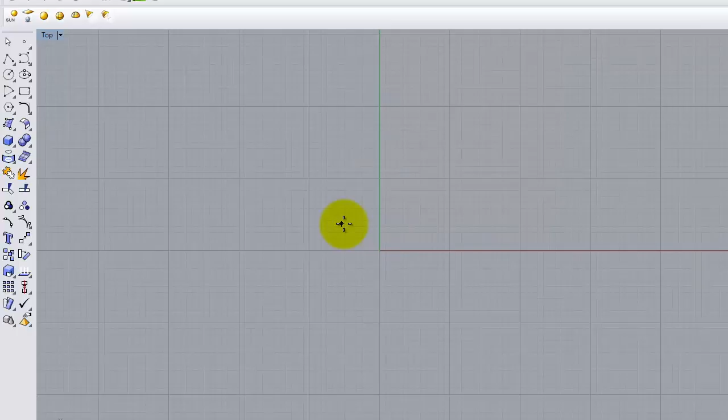We're going to start working through this coordinate system, beginning our drawing at point 0,0. I'll come to the tools and pick the Polyline tool, directly below the arrow, or type the key command Pline. The difference between a polyline and a regular line is a polyline is continuous through a set of points, so I can continue drawing.

Yeah? Your tools are missing, the left side is missing? How nice, right? You can go to Tools, Toolbar Layout, and at the bottom there's a Restore Defaults option - click on that and say OK. It'll warn you that you have to restart Rhino. When you restart, it'll fix the tools. It probably means your V-Ray toolbars will go away, but that doesn't matter for today. Restore defaults - under Tools, Toolbar Layout, at the bottom there is Restore Defaults.

So I'm going to continue on - you guys try to do that and let me know. I'm going to go ahead and start with the Polyline tool.

With Rhino, I can specify a coordinate by typing the coordinate value, just like in the world of math. So I'm going to start at 0,0 - 0 in the x, 0 in the y. When I hit enter, it'll start my line right at the intersection of the red and green axes, the x and y axes. It shouldn't be a problem.

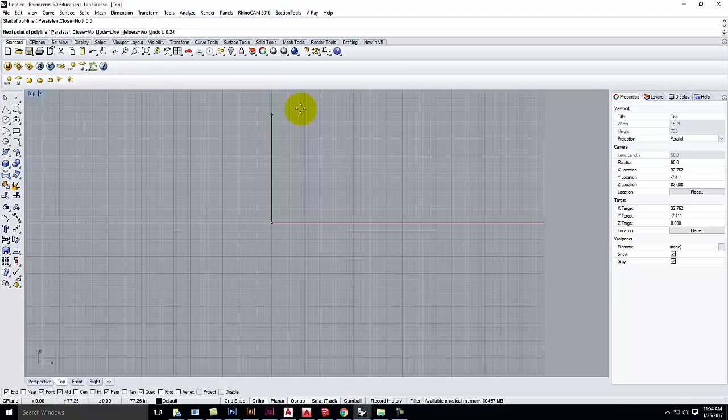At this point, I want to continue drawing using coordinates. Let's say I wanted a line to be 24 feet long, going up the y direction. I could type my next value, 0, 24, then an apostrophe for feet - just like before with 0,2, I can do 0, 24 feet. When I hit enter, I'll have a line that's 24 feet long. It makes no difference that my line went off the grid.

The grid is completely arbitrary - I can make it bigger or smaller. It just gives us a reference point. So I've gone 0,0, and the next point was 0, 24 feet.

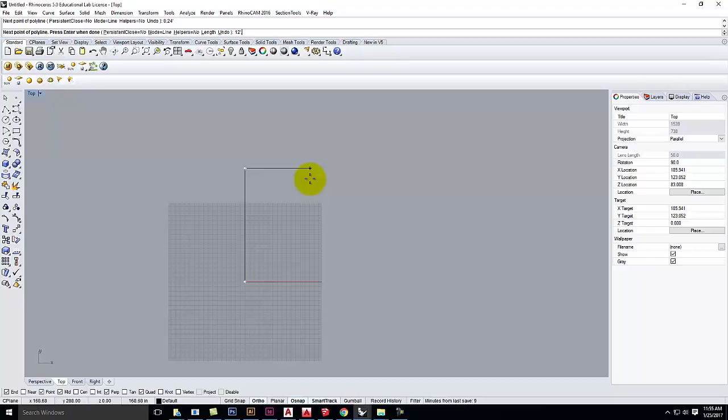Now I want to go 12 feet over, so I'll type 12 feet, 24 feet - oops, not 214, 24 feet - and hit enter on the keyboard. That puts this point out at 12 feet over and 24 feet up. Don't worry, I'm going to do this multiple times too.

So those are, as I said before, absolute coordinates - always relative to point 0,0, no matter where you are in space. The problem comes when you get to a point where you don't really know where your point is away from 0,0.

So the next point, I want to go 6 feet down from this point, right there. If I were typing it in, I'd have to say, okay, what's 24 minus 6? That would be 18, and I want to go over 12, so it would be 12 comma 18. But that's math, and we don't want to do math.

So we can use something called a relative coordinate instead of an absolute coordinate. We actually used this last class a little bit. A relative coordinate says, okay, pretend for a moment that the last point I clicked is 0, 0. So all I have to do is know where that point is and where I want to go from there. In this case, I want to go down 6 feet from my last click, so it would be 0 comma negative 6. But I need some way of telling Rhino I want relative to the last point.

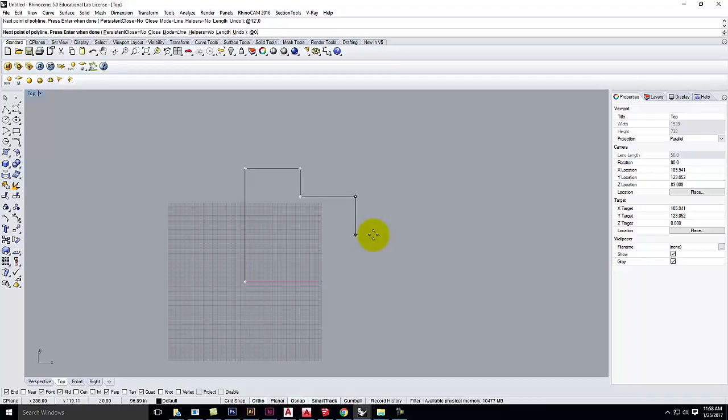I can continue in this same vein, and I could say at, relative to the last point, now I want to go 0 comma negative 12 feet, and then enter. Of course, I've done this a lot longer than you guys have, so translating these in my head backwards and forwards from relative to absolute is fairly easy because I have more practice. For you guys it takes a bit more thinking through, and that's why I have the little cheat sheet for you to follow along as I do this.

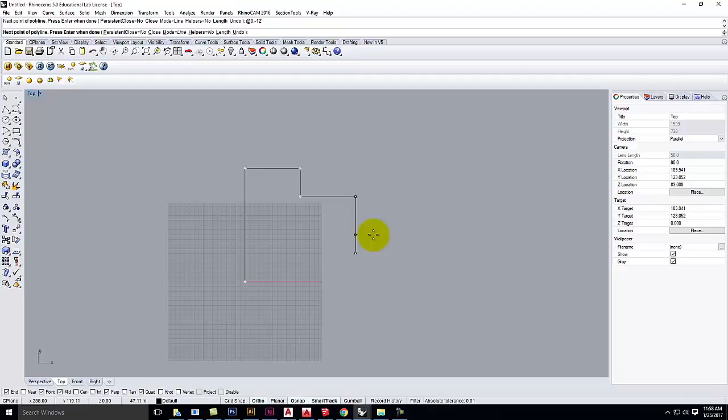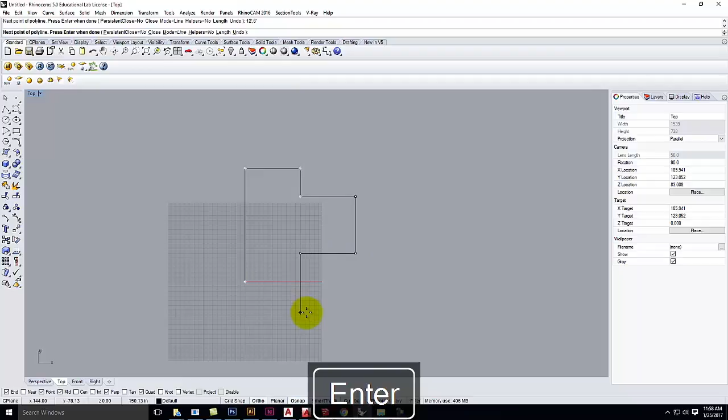So now let's switch back to having absolute coordinates. It would be 12 comma 6. So I could just type in 12 feet comma 6 feet and hit enter. That would be that point. Or I could say at negative 12 comma 0. Interchangeable.

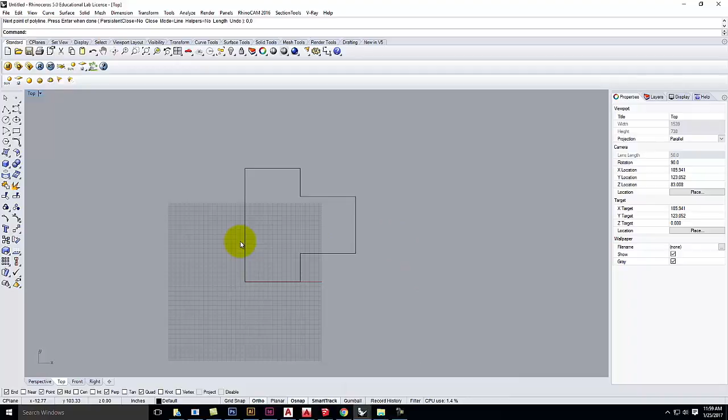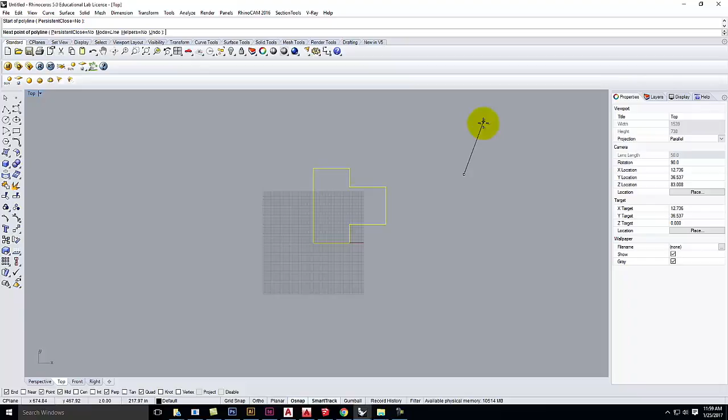So the last point, if I was doing absolute, would be 12 feet comma 0. Then I can come back and either snap, or specify 0 comma 0 as my starting point. So I drew this line all the way around. The absolute coordinates, relative to the origin of 0,0, work nicely when you're drawing right on 0,0. If, however, I started over here on a point I don't really know where it is, it would be very difficult to come up with the mathematical starting points for these. So in this instance, it would be far better to use the relative coordinates of at 0 comma 24 feet, and then continue. This would be at 12 feet comma 0, and I could work my way around this as well. So those are the coordinate systems, and it's important for you to understand that they exist.

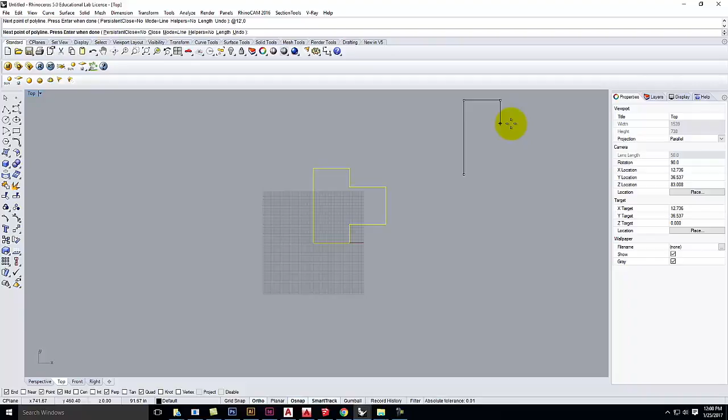Now let's talk about how you would actually draw. This is a lot of math, and a lot of thinking. Generally speaking, if you're working in something like Rhino, it's a lot easier to know where you want the point and how far you want it to be from something else. So we're going to use a point and distance method instead. This is how you're typically going to draw in Rhino.

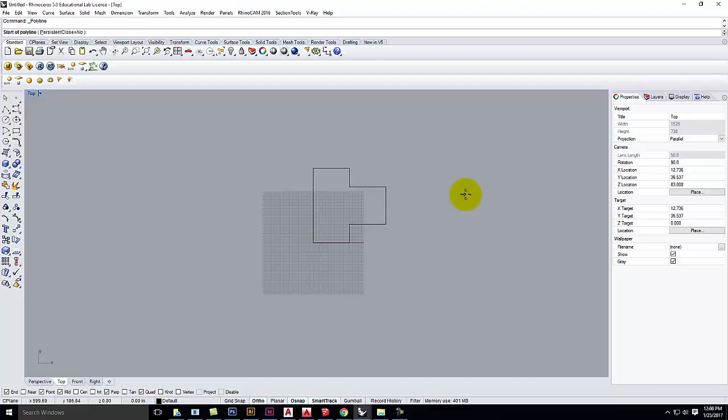So let's move over a little bit. Let's say right here, doesn't matter exactly where. I'm going to click to start. I'm going to move the cursor in the direction I want to go, and I'm going to specify a length.

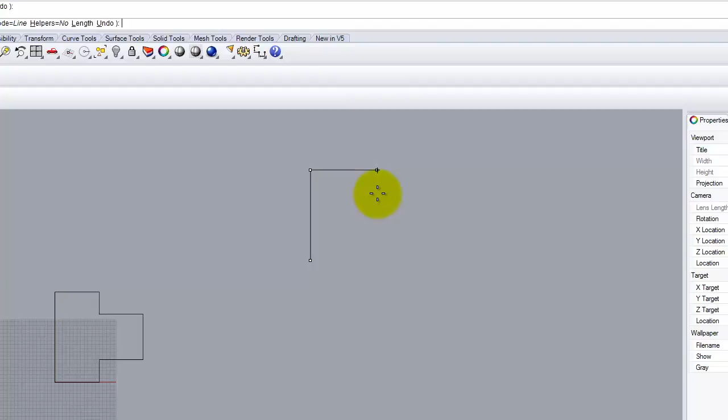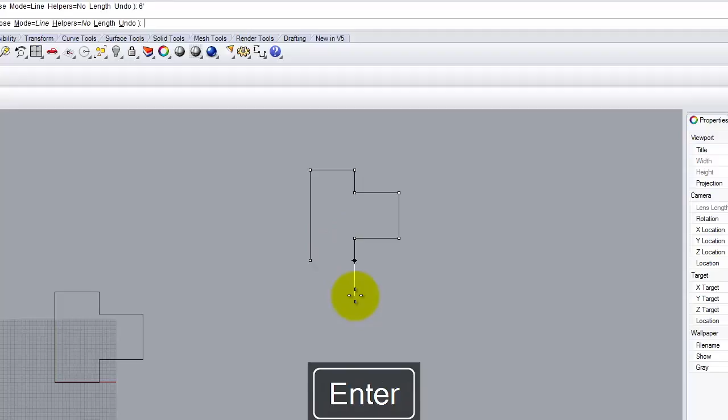So we'll say 24 feet, and then enter. Now it's going to ask which direction I want it to go, and I can continue on. So I'll type 12 feet. Notice there's no @ sign, no commas, it's just the distance. I want to go 6 feet in that direction, 12 feet in this direction, 12 feet in this direction. You can see this is a lot faster, right? So we'll go 12 feet there, 6 feet there, and we'll close it.

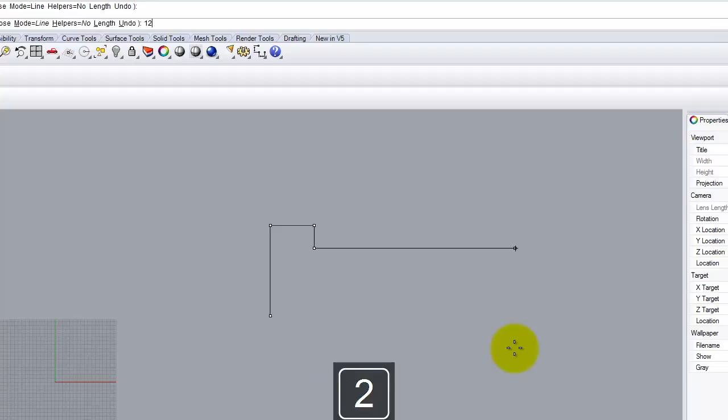All right, so once again I'm going to delete these. Polyline, doesn't matter where I start, and I'm going to go 24 feet in that direction, 12 feet there, 6 feet there, 12 feet there, 12 feet there, 12 feet there, 6 feet there.

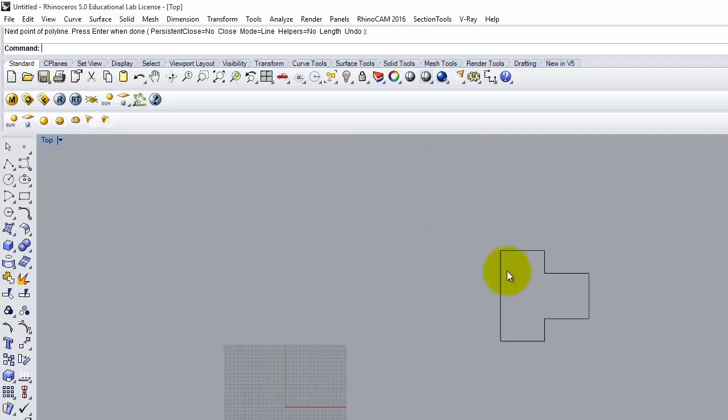And that's very much how AutoCAD would work, or any of the major drawing programs. It's relatively simple to work your way through. Once I have this, it's time to start actually working and manipulating with it.

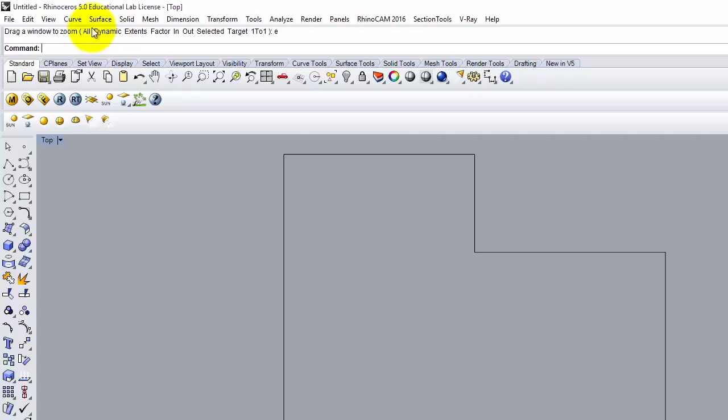So the first command we're going to use is the offset command. Let me go ahead and select this. I'm going to type Z for zoom and then E for extents, which will zoom in to show just this one object for me. All right, there it is. Now I'm going to use the offset command. I can either type offset, or I can go up to Curve, offset curve.

So again, I can type offset. It's indicated in bold in that typewriter font that I can type offset to get to it. Or I can go up to Curve, Offset, Offset Curve. And if I look at the command line, it asks me to select a curve to offset.

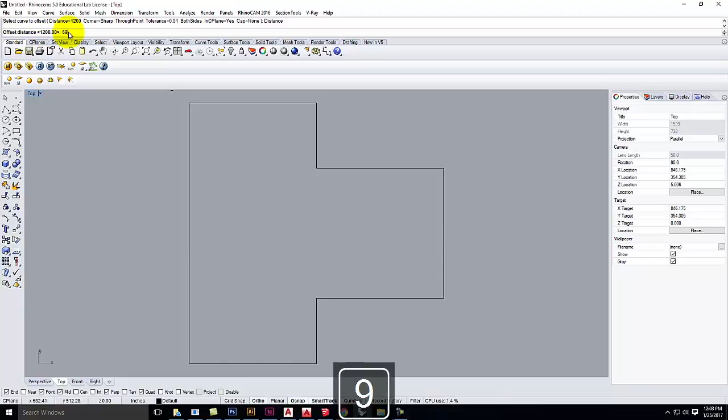Obviously I'm going to want this curve, but before I do that, I need to know the distance I want to offset. If we look at the first option here, it says distance, with the D capitalized, so I can type D, enter, or click on distance. I want to type in the offset distance, so in this case it's going to be 6 followed by the quotation mark for inches, and I'll hit enter. My distance is set to 6.

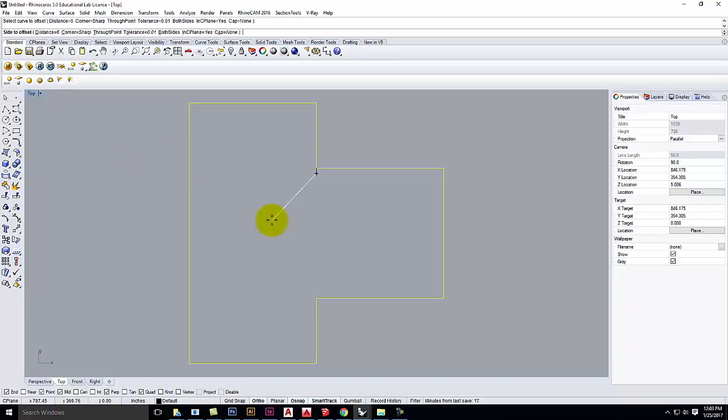Now I can select the curve to offset, so I'll select my little wall here. Then it asks side to offset—do I want it toward the outside or toward the inside? In this case I want it toward the inside, so I move my mouse inside the shape and click. And it makes a second line.

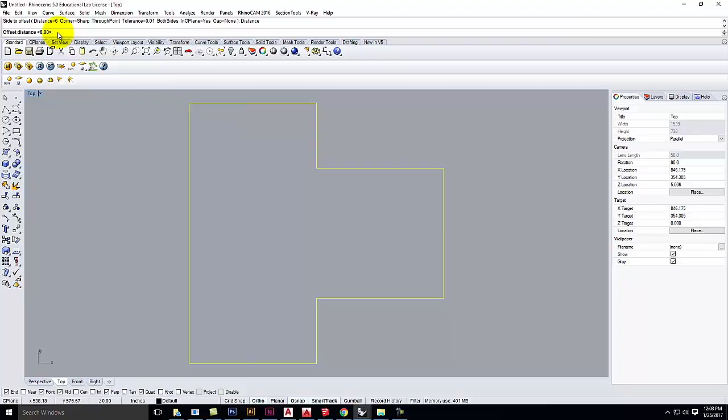Okay, I'm going to do that again. I'll go up to Curve, Offset, Offset Curve, and then select my curve to offset. There it is. I can specify a distance—it's currently 6, so that's fine, that's the way I want it. Then I'll specify a side to offset, and we want it to go toward the inside. There it is, and it makes my offset for me.

Relatively easy. So now that I have an offset, it's time to start adding some doors and windows. Let's start at the top here, and I'm just zooming in with my scroll wheel. I'm going to start at the top right there, and I'll use my polyline, and I'm going to use my object snaps at the bottom. I'm going to make sure mid is checked.

With mid checked, when I move the mouse toward the middle of this line, my snap automatically jumps and I see the little mid show up, right? I know I'm going to be right on the middle. I come down to the lower line here, and I get two snaps. So unlike AutoCAD, which flashes between symbols, we get a quick little text version that says perpendicular and midpoint. So it's both perpendicular and the midpoint. Then I'll go ahead and click on that point, and I'll hit enter.

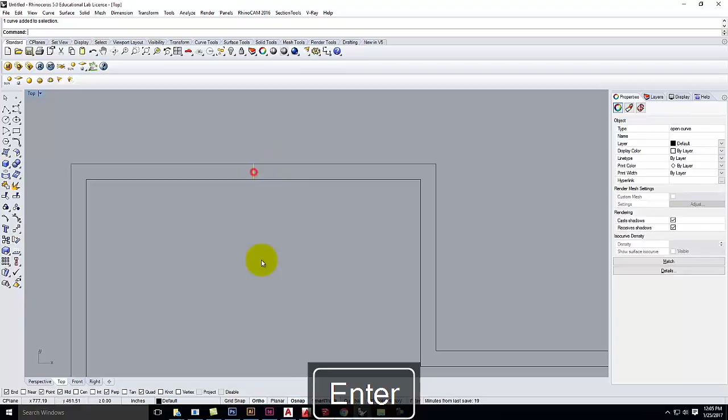Okay, so now I have this little line that represents the middle of this wall, and I need to offset it. We just used offset, both sides, by half the door. Remember, on the back side, I have some loose measurements—you're not doing any dimensions on this today, it's just guides for you so you know how big things are. It's 3 feet, so half of 3 feet is 18 inches, so I need to offset this by 18 inches.

So I'm going to go back to Curve, and then to Offset, Offset Curve. Select curve to offset.

There it is. Distance needs to be 18. If I didn't know 18, I could do 1 apostrophe 6 quotation for 1 foot 6 inches. That would work too. I'll hit enter, and it translates to 18, you can see.

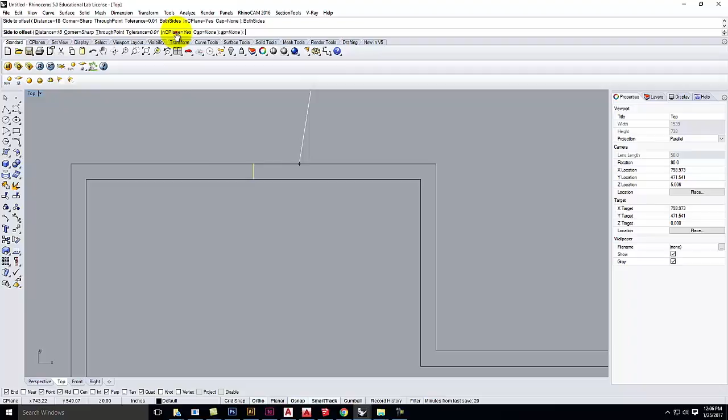So I can do it to one side and I can do it to the other side. Or if I look at my options up here, I also have the option for both sides, which is pretty cool. So let's click both sides, and it'll offset both directions at once and give me this line, and that line.

Now that I have those two lines in place, I'll go ahead and select this line in the middle there. And this is a good point to kind of point out how selections work. This is very similar to AutoCAD.

If I select from the left side to the right side, it selects anything that is completely contained within my object. So if I start from the left and go over to the right, I get all three of those objects. If, however, I start from the right and go to the left, it's anything touching this selection, so I get the three objects and the lines that go beyond the box. It takes a little getting used to as to which direction you're selecting from, but it can make a big difference.

So for right now, I'm going to select from the left to the right, just that middle line, and then I'll press the delete key on the keyboard. I could also type DEL for delete. Just a matter of which is faster for you.

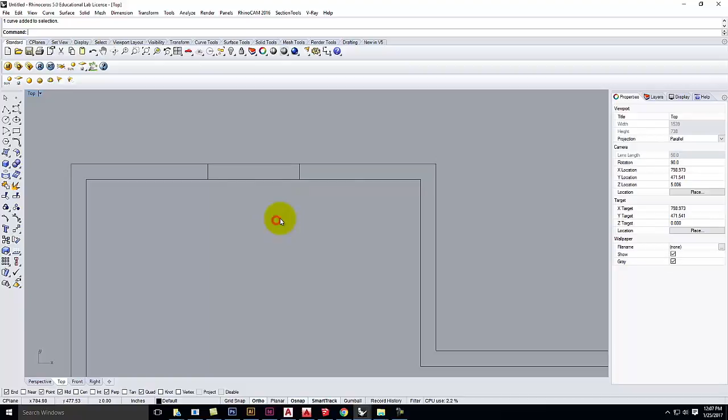So now that I have this line and this line, I also have my lines that represent the walls. I need to perform something called trim, to get rid of this line segment that I don't want. Just like in AutoCAD, I can go up and it's under Edit, then Trim.

And it's going to ask to select the cutting objects first. So this line and this line are doing my cutting. I'll go ahead and hit Enter. Then it says select an object to trim. Well, it would be this line there, and it would be this line there.

One disadvantage of Rhino versus AutoCAD is AutoCAD previews the trim, and you may have noticed that if you've worked in AutoCAD—it'll make the line go away when you move over it. Rhino doesn't do that. It is what it is.

I can, however, also drag through these two objects and trim them both at once. So when you have a lot of objects and you want to trim, you can drag through and do a group trim, so to speak. So once I've done this trim, I'll go ahead and hit Enter, and I now have a hole cut in this side of the wall.

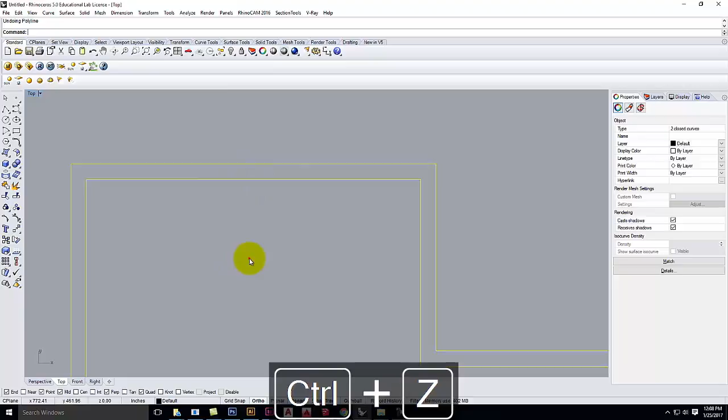I'll come back and do this trim again for you guys. I'm just going to undo and get back to here, and I'll do it again. Like I said, at this stage of the game, I repeat myself a lot. If it's easy for you, life is good. All right, let me continue.

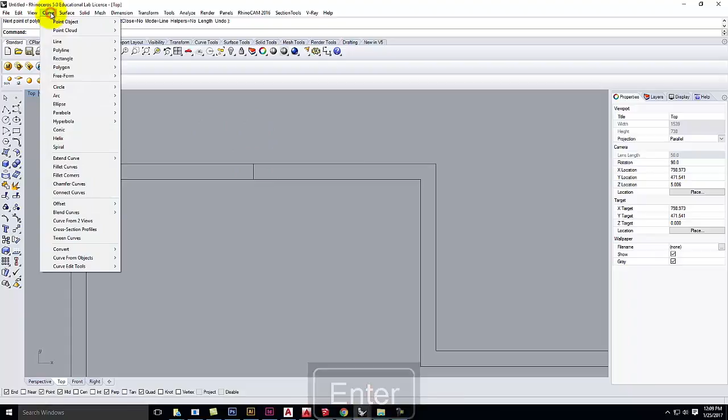Polyline, I have midpoint checked. I'm going to go from the middle to the middle. I'll hit Enter. Then I'm going to offset this curve, so I'll go to Curve, Offset, Offset Curve. Select Curve to Offset—there's my curve. My distance, I want it to be 18, or 1 foot 6 inches.

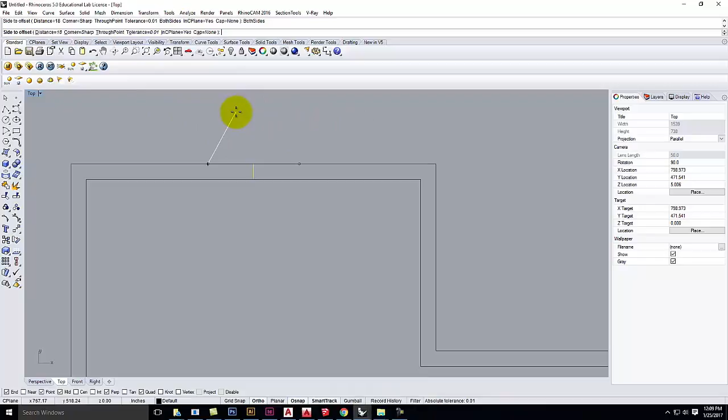Enter. And I want to offset both sides, so I'm going to click on both sides so it does it both at once. I'll go ahead and click, and I get this line and that line.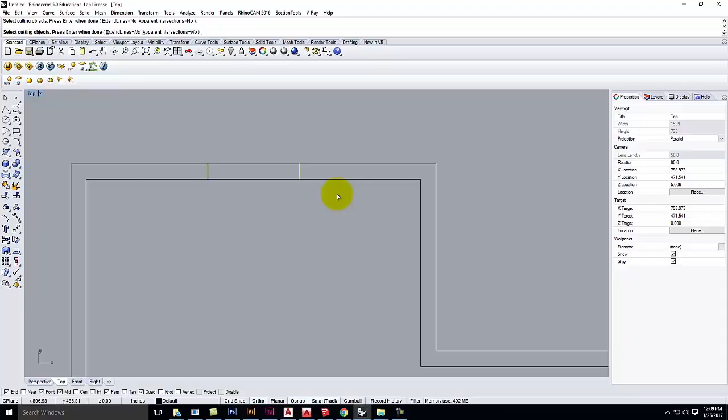Now that I have this line and that line, I'll go ahead and delete the middle line because I don't need that anymore. And I'll go ahead and trim, Edit, Trim, or I'll type Trim. Select my cutting objects—it would be this line and this line. I'll press Enter, and then I will click on that and that to make them go away. When I'm done, I'll hit Enter to finish.

And now I have that hole through my door. So at this point, I'm going to go ahead and join these lines together. I'm going to select from the right to the left, and I'm going to go to Edit, Join, or I'll type Join, or press Control-J.

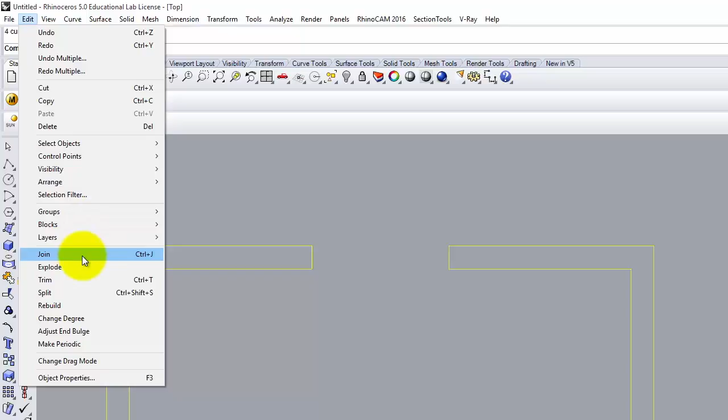And I end up with a continuous line that goes all the way around. Okay, so now that I've done that and I've joined it, now it's time to draw a window.

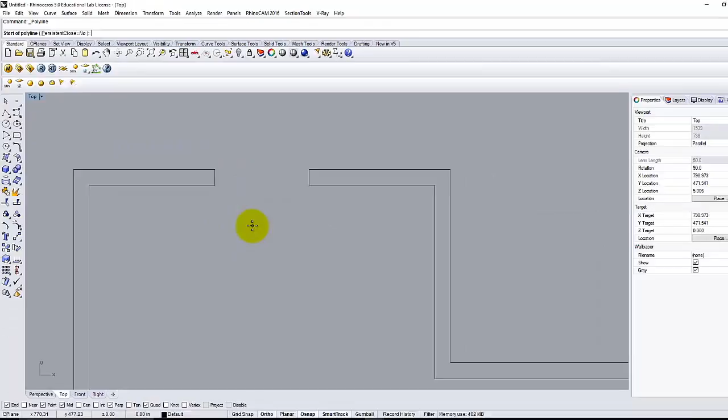So I'm going to move on and draw a window. I'll start with my Polyline tool again. What typically happens when people start working in Rhino is they say, okay, I need to draw a window, and I know that it is 18 inches from this corner. So I'll just click on the corner, and then I'll draw over 18 inches. There it is. And then I'll draw down, and now I have my first line.

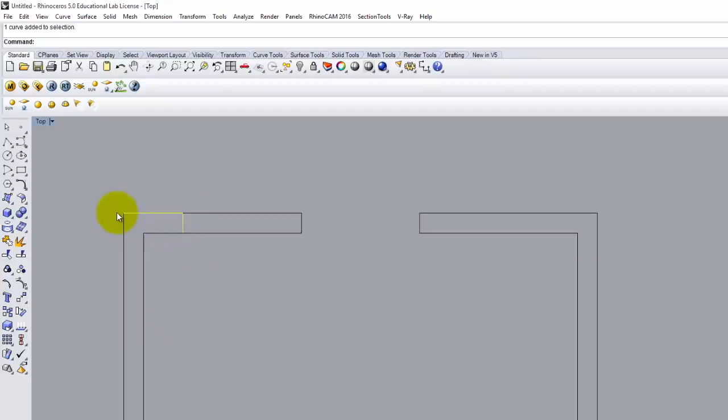Okay, there's a problem here, though, in that the line that you just drew is actually an L. And as soon as we start to do extrusions, we're going to have overlapping surfaces. It's not going to render nice. It's not clean. So we have to fix that first.

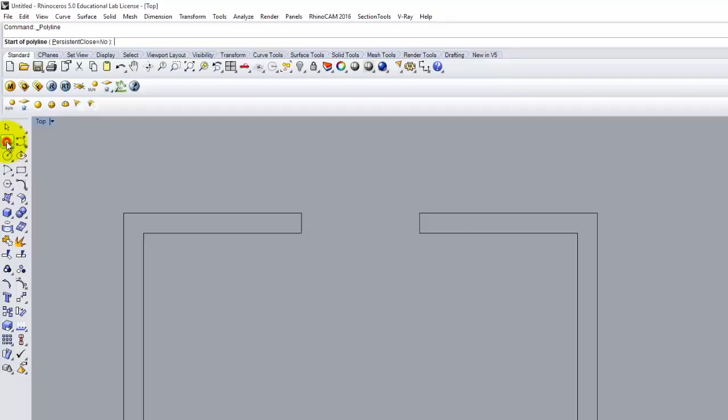So we're going to use something, and this works extraordinarily well in Rhino, called smart tracking. This is something I really want you guys to practice today and make sure you understand how it works. So I'm going to use a polyline, just like I did before. As I move my mouse over this corner, you see that my point turns white. It turns white. Once the point is white, without clicking, I'm just going to move my mouse to the right. And as I do that, I get a white line and the point turns blue. This is smart tracking.

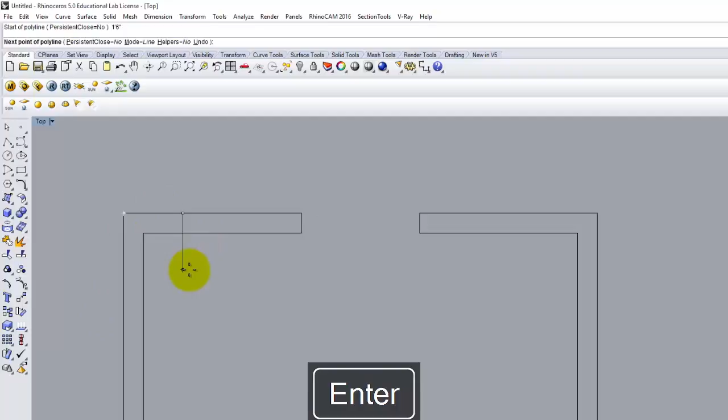I can now type in a distance and it will start that distance from the blue dot. So I could type in 1 foot 6 inches and my line will start 1 foot 6 inches from that point. And I can now draw down perpendicular, enter, and that is just a single line. There's no line across the top.

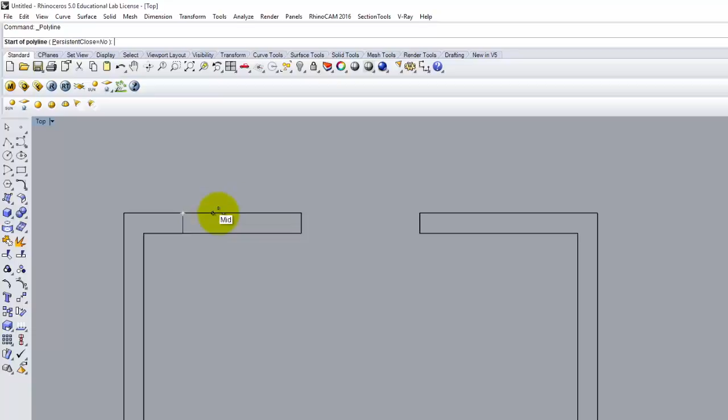So if I were to continue using that, I could use my polyline. My window was 2 feet wide, so I'd set my point there. It turns white. I move over, and then I can specify 2 feet. Now the problem here is it accidentally created a second point. You see that? I don't want that point. I'll hover over it, it should go away, and then I'll type 2 feet. So it's always 2 feet from that little blue point once you have the white line. And I'll go ahead and press enter.

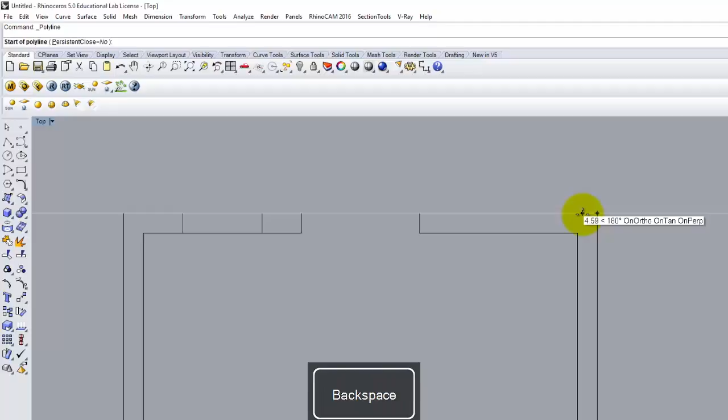Okay, let me practice that again over on this side. So we'll set our point, we'll move over, and I'll type what was it? 18 inches. There, I'll finish. I'm going to repeat the command again. I'll start there, I'll move over by 2 feet, and I'll draw that line. So it's a really good habit to get into when you're working in Rhino to use this smart tracking.

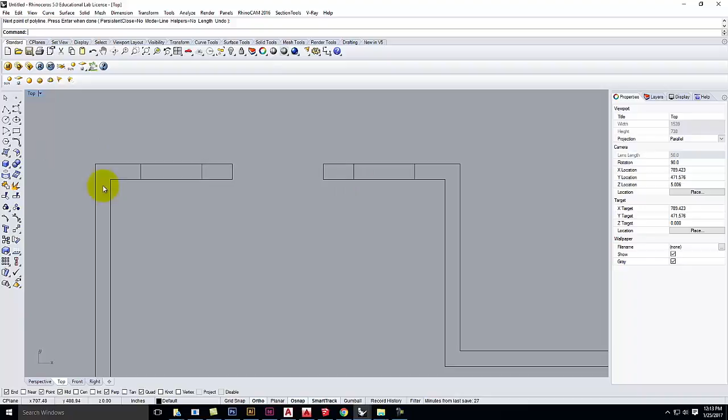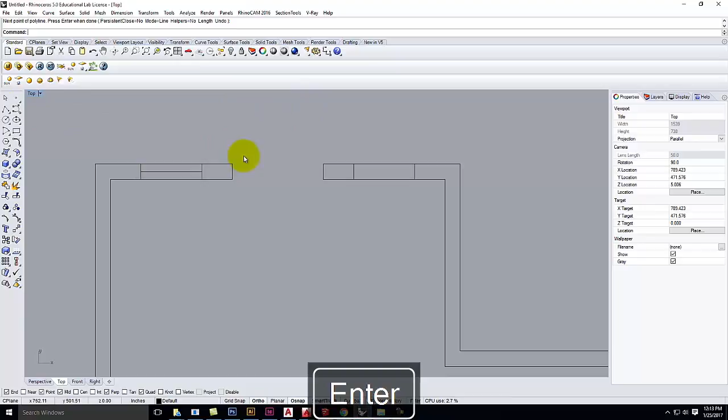Now that I have those set, I'll go ahead and draw lines in the centers of these windows to represent the windows. So I'll just snap from center to center and from center to center. By the way, as you're drawing, if I draw from middle to middle and I hit enter, if I want to repeat the polyline again, I can just right click and it'll repeat the same command again, and I can draw that as well.

You should have ortho on. All right, well, I can take a look.

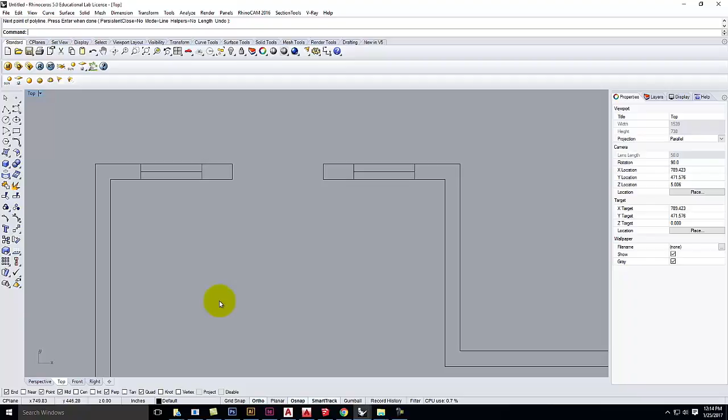So basically you have like a three-sided line for the window. How many lines make up your window? So the lines that make up the window are this line, and that line. Right? This loop goes all the way around. Because like right now I have the 2 feet line too, you have a line that goes across the top here. Okay, so you're going to want to get rid of that line.

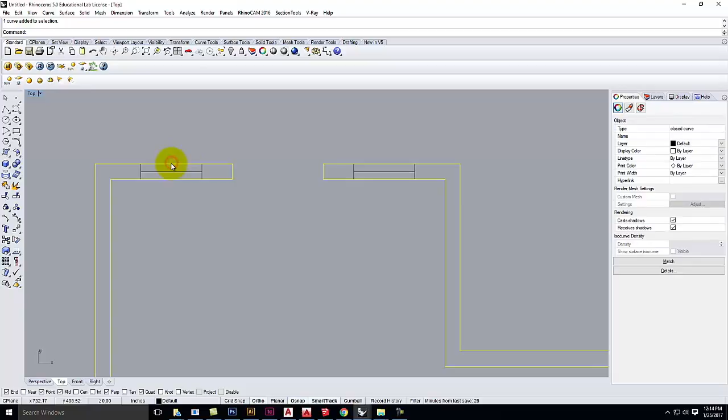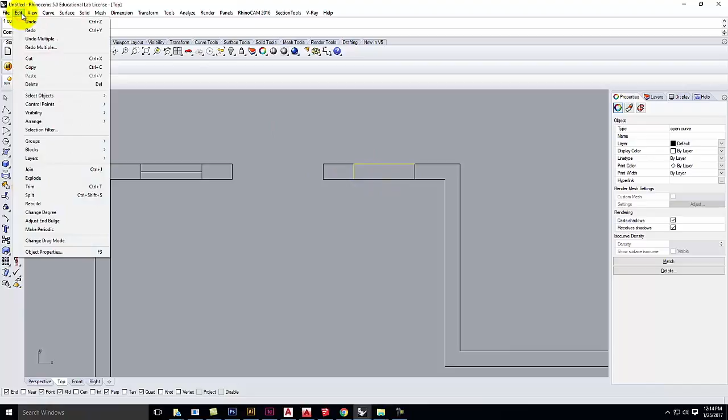Okay, if it's connected, let me do a quick illustration here. Let's say that I went over, this is 18 inches, like that, and then I drew a line that went 2 feet, and then went to there like that. So I ended up with that. If that's the case, I need to explode this into 2 segments. So I'll go to, I think it's under Edit, Explode, or I can type Explode, and then I can pick just this single segment of it and get rid of it. This will matter when we do our extrusions.

And we won't do extrusions until next class, but it's part of keeping it clean. Question?

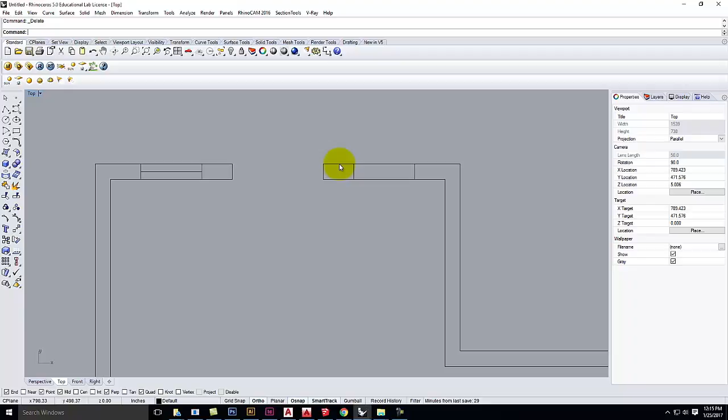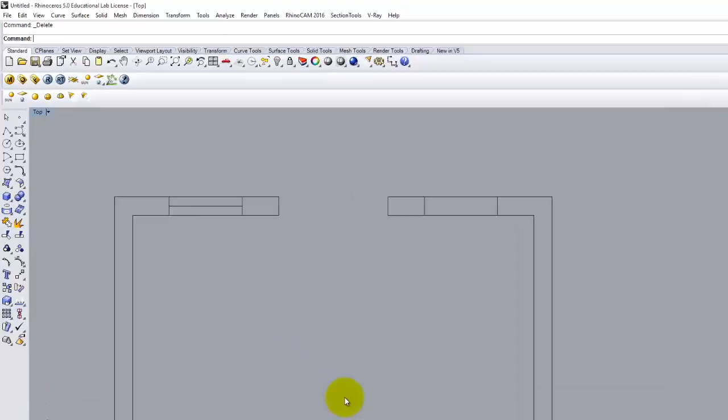Does it say SmartTrack in bold at the bottom of your screen, center, right? It should be bold. If it's not bold, you have to click on it to make it bold. If not, I can come in and help you through it. Okay, let me go ahead and finish up.

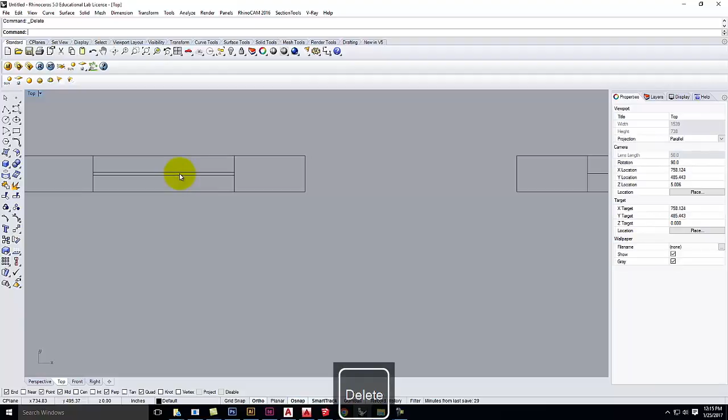I'll draw this across. Now we could get more technical. I could do an offset with a distance of maybe a quarter of an inch on both sides, making two little panes of glass, and get rid of the one in the middle. You can complicate things, but we're shooting for the basics right now.

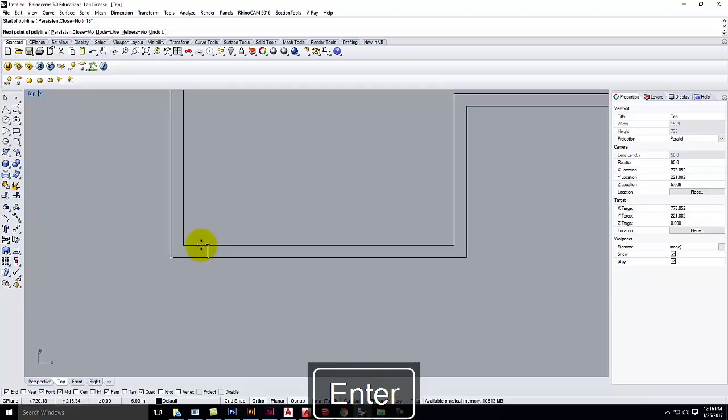So I'm going to continue. Let's say I want this window to exist down here at the bottom. I could come over here, start drawing from here, 18 inches, and draw the window. But since I've already drawn it here and the window down here matches up, I could select this and mirror it down to this side. So I'm going to go to Transform, and then Mirror.

It's going to say Start of Mirror Plane. Remember, we're working in Rhino 3D. Even though everything we're doing is two-dimensional right now, the reason it's saying plane is because if we're building in 3D, it's as if there's a plane, not just a line, that we're reflecting across. So we're going to set that plane at the midpoint of this wall and go across to the midpoint over here, and it's now created that line for me.

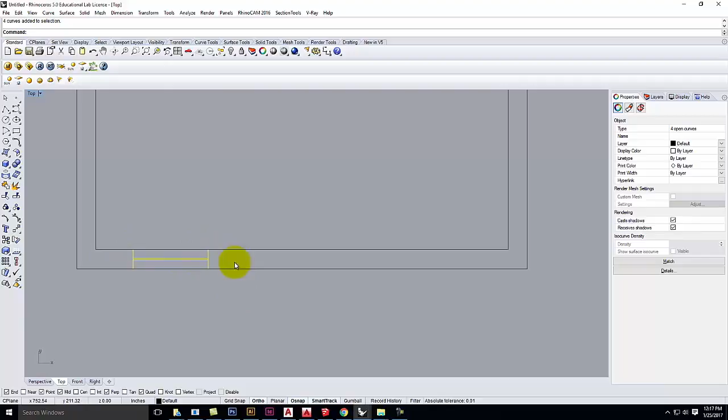Now I want to take this window, and I need a copy of it that is 6 inches from this side right over there, so there's a gap of 6 inches. I can go to my Transform copy—that's different from Edit copy. There are two different copies in Rhino, same thing in AutoCAD.

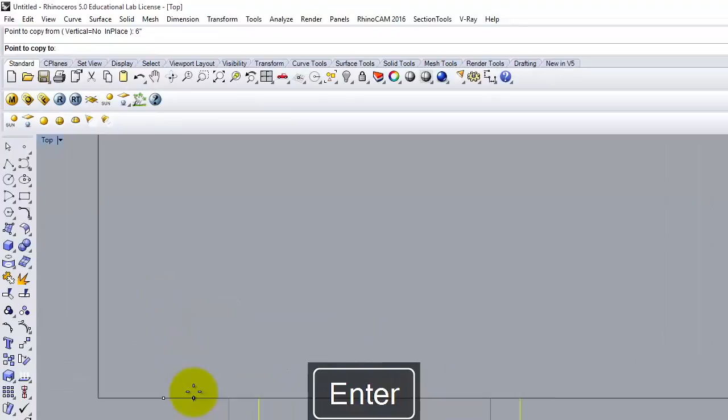So we want to go to Transform copy, or just type copy and you'll get there. I'm going to use that smart tracking thing again. I'm going to set my point here on this edge, go over 6 inches, and then press Enter. Now I can move my copy from 6 inches away to right there and press Enter. It's a little trickier way of using it, but it's good practice to see if you really understand smart tracking.

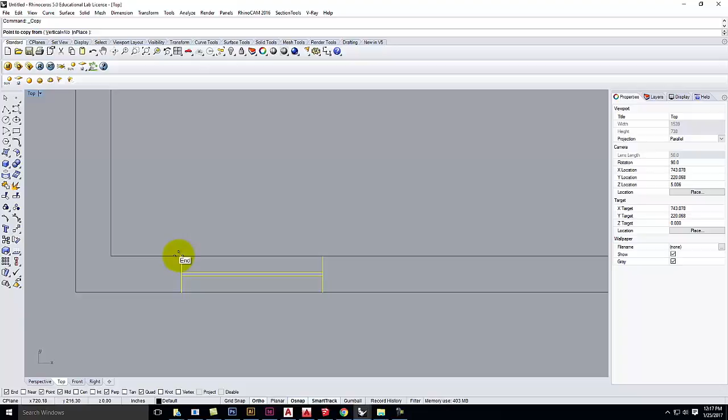So once again, I take my window. I go to Transform Copy. I set a point here, go over from it 6 inches, and then I snap it to that side of the window, and I get those two pieces.

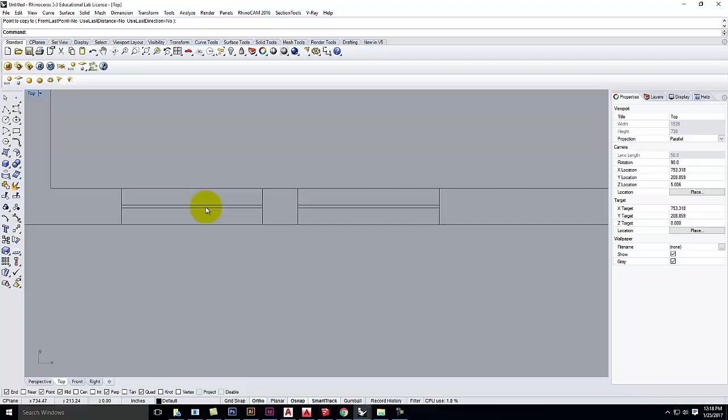What was the offset for the window panes again? I did a quarter of an inch in each direction, so they're a half inch apart total. It doesn't matter, you don't even have to do it—I'm just showing you that you can keep adding levels of detail to this.

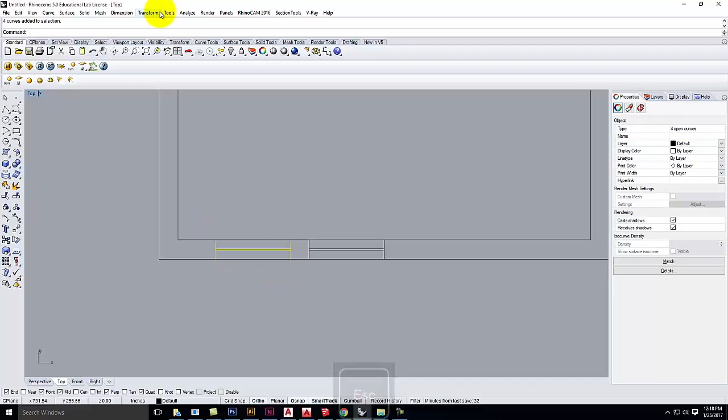So in the interest of efficiency, I also want a window over on this wall, the same distance from the corner up this way. Of course, I could start here, go up 18 inches, and draw it. Or I could select this, and when I do the mirror to it, I'll go to Transform Mirror.

I'm going to set the mirror plane at 45 degrees so it reflects at 45, going from there to reflect the mirror at 90 degrees to where it was. That's an advanced technique, so if I lost you a little bit there, it's okay—you can just draw it. But at the same time, that's about efficiency when you're drawing, and learning to use those kinds of things is very, very valuable.

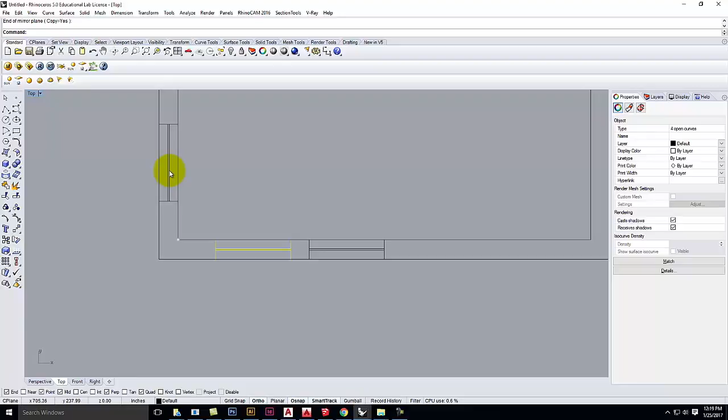So once again, I'll show you how I did that. I took this window, went to Transform and then Mirror. Start of mirror plane, I picked this corner. End of mirror plane, I picked that corner. And I mirrored it across a 45-degree line.

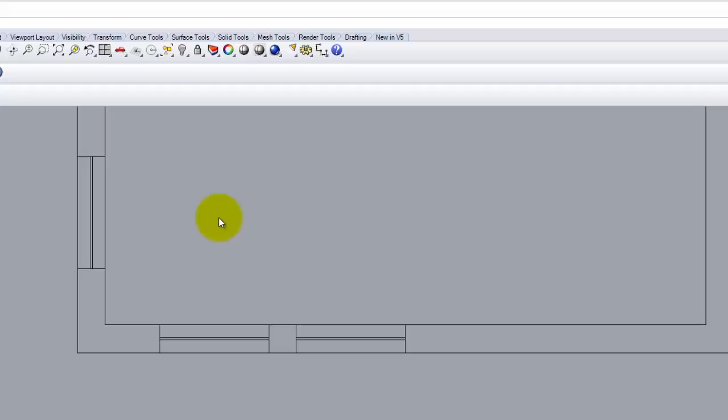Could I copy it and rotate it? Sure, that's another way of doing it—there's always multiple ways of doing it. So these are the basic commands we're working through today: trim, offset, polyline, and smart tracking being critical. There's a few other things that might be relevant that I'll point out so you're aware of them.

And that is, if you had a rectangle like that and wanted to round the corners, you can use a command called fillet. If I go to Curve, fillet curve, select first curve to fillet or radius, I'm going to pick a radius of say 2 inches, and I can then round the corners.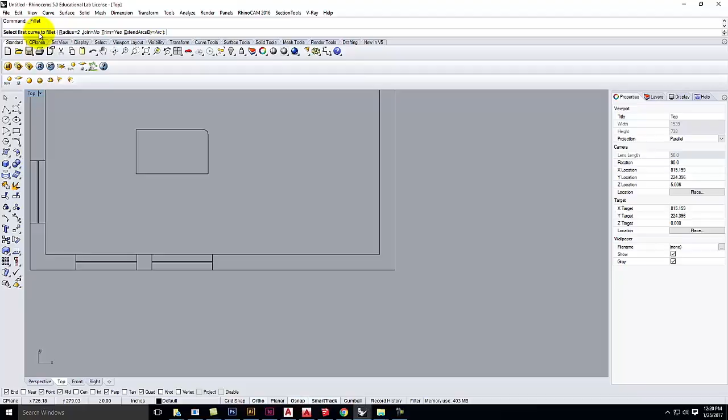So let me do it again. Fillet, select first curve, there's my curve. Select second curve, there's my curve, and it rounds the corners. So I can do stuff like that if I wanted to.

Chamfer is the same thing. I can specify this time a distance, so let's do 2 inches again. And instead of being rounded, it would clip the corner. So those are other things that you can do.

Is it necessary that you learn those now? I'm just pointing them out to you. So if you feel comfortable, play around with this. If you don't feel comfortable, don't worry about it yet. We'll get you there.

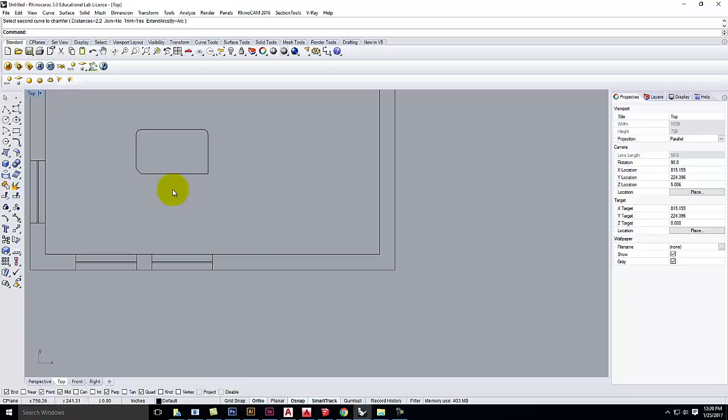So the rest of the drawing on the back of this sheet includes some more windows and extra detail, that sort of thing. Please feel free to do whatever you want in terms of what the floor plan looks like. If you want to add stuff to it, go for it. This is just a guide to get you basic skills.

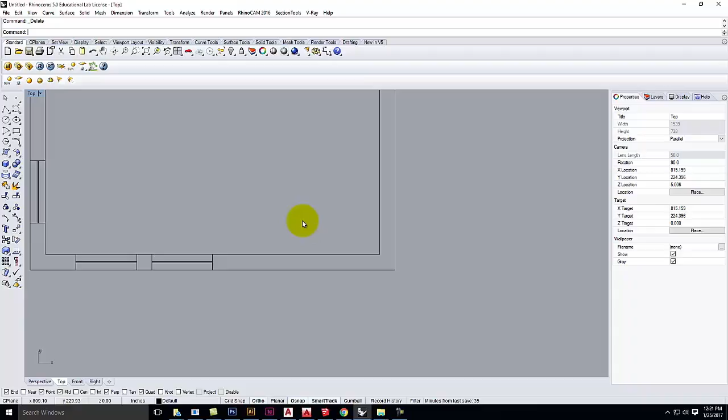Make sure that you save this file in two different ways. Number one, we're going to save the Rhino file itself. So I'm going to go to File, Save. This is going to save a Rhino 5 3D model, which is a .3dm file.

Obviously you need this. I'm going to save it into my folder. So here's my live demonstrations folder. Here's exercise 202. I'm going to save it under EX202, Grant Adams, let's do fall 2017 since I have multiple versions there. And we'll go ahead and click on Save.

Spring 2017—at least I got the 17 part right. So I'll go ahead and click Save, and that will save my Rhino file, which is really important that I save that file.

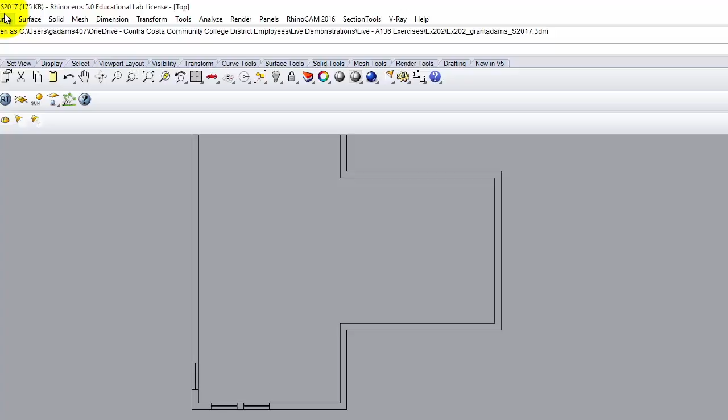For a drawing this simple, it's unlikely it's going to crash, but it would probably be better if you saved it earlier in the process rather than later, just in case, because that writes the backup file. So I now have that saved, but I also need to be able to post this online.

I suggest in the handout that maybe you want to print it, but to me printing never works out very well in Rhino. So we're just going to do the capture again. I'll click this little triangle, go to Capture to File, and this will save a JPEG.

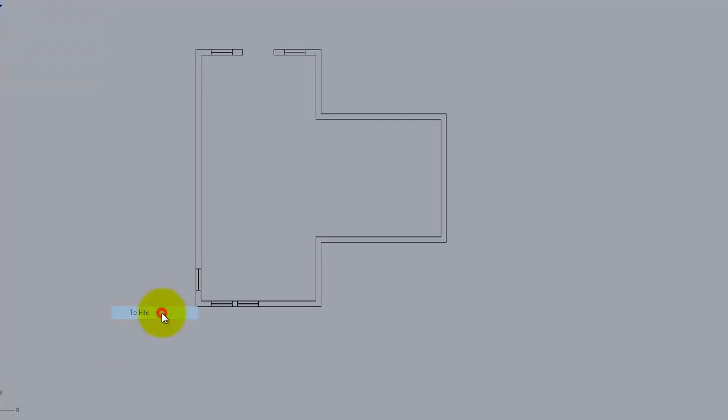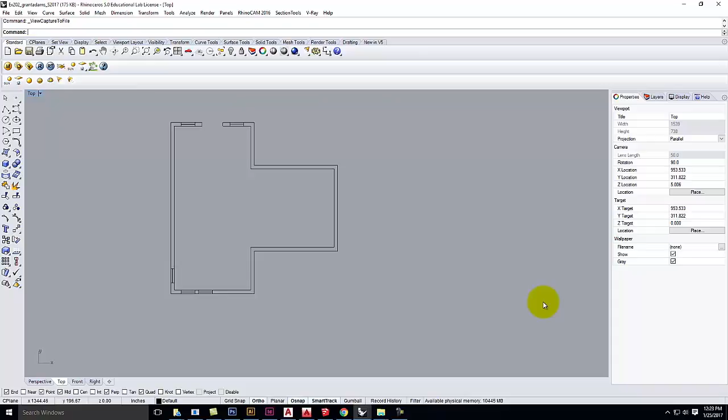Let me put it into my live demonstrations, today's folder, and this—let's see if I can get it right—is spring of 2017. I'll go ahead and click Save, and that will give me a JPEG of what I see on the screen, which is essentially proof that I did it.

Now, most of you have already posted to the course website. Some of you have not. Since some of you have not, I'm going to walk through that part. For those of you that have done it a million times, zone out for a while, or start working on your AutoCAD drawing.

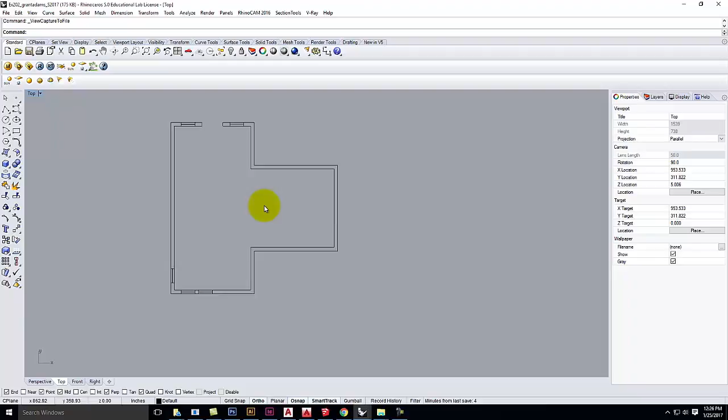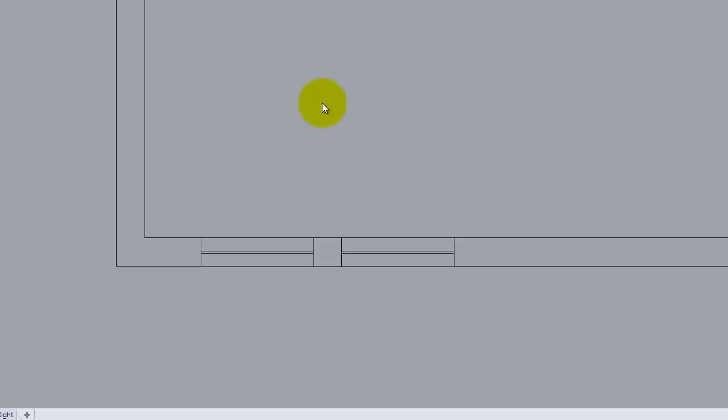The mirror? So what I did with the mirror - we'll cover rotate next class - but with a mirror, and this is kind of a cheater way of doing it. It's kind of like when you do a fillet with a radius of 0, you can connect 2 lines. It's not really what it's intended for, but it works. So on the mirror, I want this to go here. If I imagine a 45-degree line, kind of like in 130 when you have the reflecting lines and you draw across, we're doing essentially the same thing. So I can take this and go to transform, then mirror, and I can draw a 45-degree line, essentially from there to there, and mirror it across the 45. So it saves a bunch of drawing. Makes life efficient.

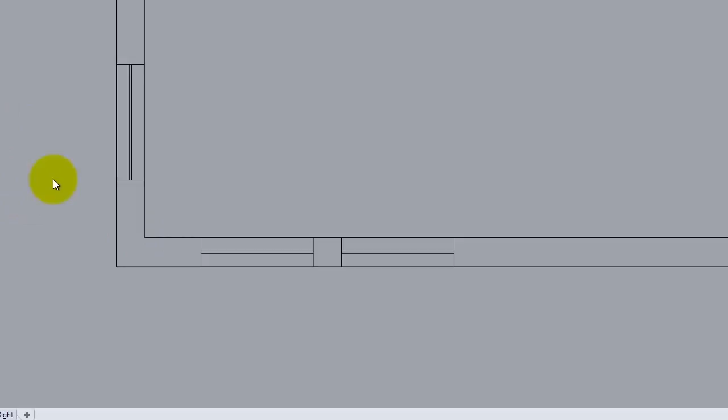How do I know I posted? Like when I click on view post, after it says publish, it went to a 404 page. That's weird, okay, so I'll come and have a look at it, but you should be able to. Let me log into a different account. I'm in my administrator account, so I have lots of other options that you don't have. So give me a second, and I'll log into a student account.

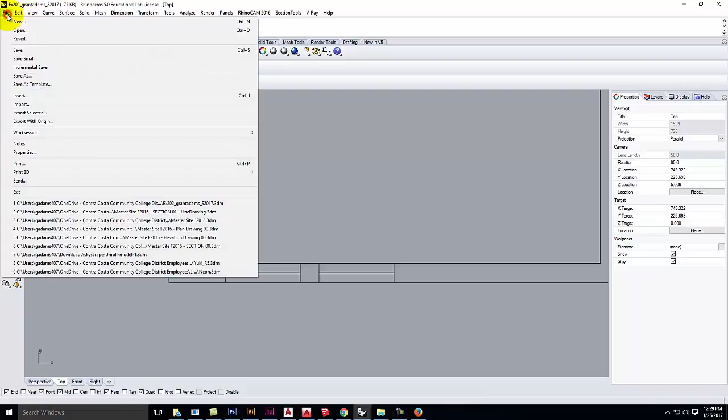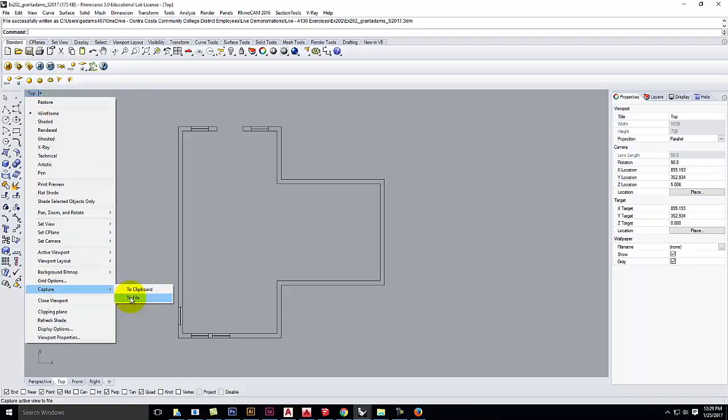So in the world of Rhino, we have 2 saves to do. One is the 3DM file, the Rhino file, which is as simple as file, save, give it a name - it's a 3DM file. When we want to create the view to post online, the JPEG, the easiest thing at this stage to do is go to this little triangle where it says top, click on it, go to capture to file. That'll make a JPEG for you, and you can specify where it goes and save it as a JPEG.